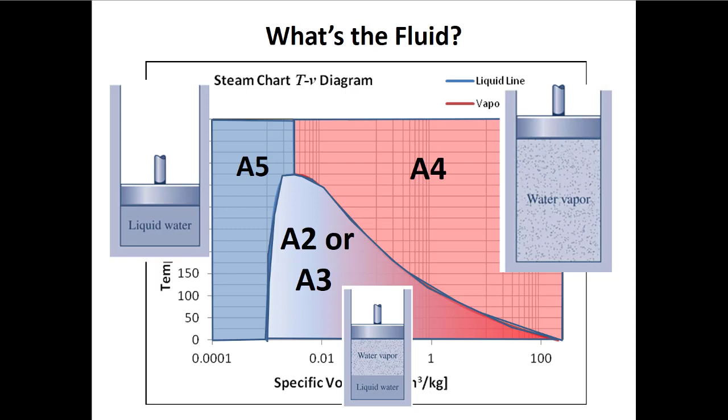So we need to figure out, are we two-phase? Are we superheated vapor or are we subcooled liquid? My advice to you would always be to look under the vapor dome. Are we two-phase? If we're given, say, temperature and pressure, are they the right temperature and pressure for boiling to happen? And if not, where are we on this phase plot?

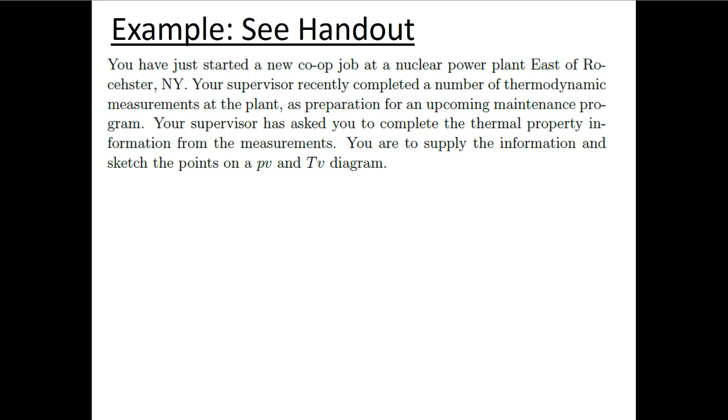The example, which you can find on the My Courses webpage, but if you don't have it, that's okay because we'll go through everything here. But if you'd like to look at it, it's helpful because it has the state table on it. Here we're kind of role-playing that we've started a new co-op job at a nuclear power plant east of Rochester. Your supervisor completed a number of thermodynamic measurements at the plant as preparation for an upcoming maintenance program and has asked you to complete the thermal property information from the measurements. You're to supply the information and sketch the points on a PV or a TV diagram.

So they give us the information in a way that I probably wouldn't like if I was the co-op in question, because I want to have things on a table. But this is often what happens when you're an engineer: you're talking to someone who wants an answer, or wants a particular piece of information, and they just give you the information in the way that makes sense to them. But the way that makes sense to them isn't always the way that we want it.

So in this case, we have a list of values. We know the mass is in kilograms. We have a pressure and temperature at state 1, a pressure and a quality at state 2, pressure and temperature at state 3, temperature and quality at state 4, and they tell us it's a saturated liquid at state 5. This one's a little tricky, because when they tell us it's a saturated liquid, that is enough information to fix the state.

This is kind of a sneaky way of telling us that the quality is 0. So when the quality is 0, we have all saturated liquid. And when the quality is 1, we have all saturated vapor. So here, this is telling us that X is equal to 0.

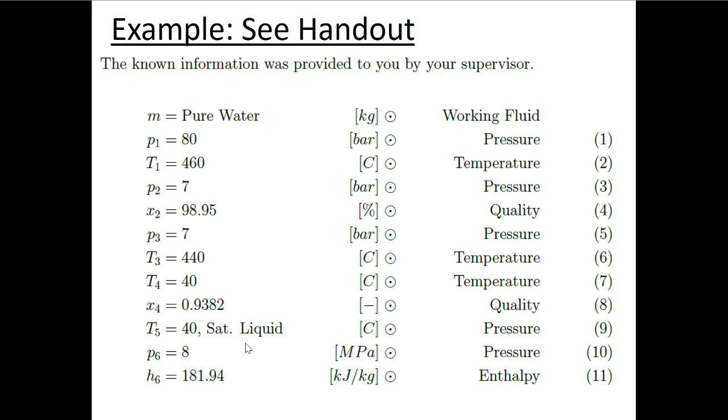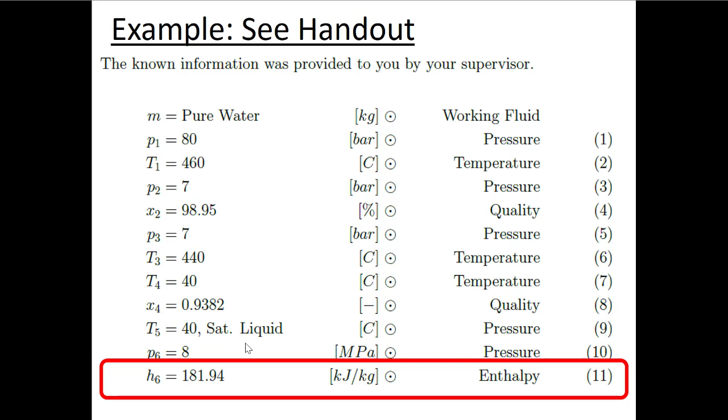At state 6, we're given a pressure in megapascals, and we're also given a specific enthalpy. Now, we haven't worried too much about enthalpy, but it's a property, and we can use it for linear interpolation between two rows on our tables. So just as an aside, we have this property called enthalpy. We will become very familiar with it as we move through the course, particularly as we start to talk about open systems. It's very much like specific internal energy in that it tells us how much energy is locked up in some bit of mass at a given state.

The units are just like specific internal energy, so they're kilojoules per kilogram, or if you were in imperial, this would be BTU per pound mass. So it's still an intensive measurement of energy.

It turns out that as we work through the class, as we develop an open version of the first law, we'll have a term that looks like this: the specific internal energy plus the pressure times the specific volume. Now, what we learned in engineering is that we want to be efficient. So if we've fixed any state, then we know the specific internal energy, we know the pressure, and we know the specific volume.

For any given state, all these pieces of information will always be the same at that particular state. So instead of having to look up 2 or maybe 3 things on a table, we've created these tables with extra columns for specific enthalpy so that we would look less things up, right? We're not lazy as engineers, we're just efficient, because it's a pain to keep looking things up when we don't have to.

So specific enthalpy is just another measure of internal energy, but it includes not only the internal energy, but also this term that's pressure times specific volume. So that's got something to do with that pressure work, like that integral of P dV that we've been talking about. So I guess the thing that's important to know here is that it's not necessarily an independent property. It's a function of the specific internal energy, the pressure, and the specific volume.

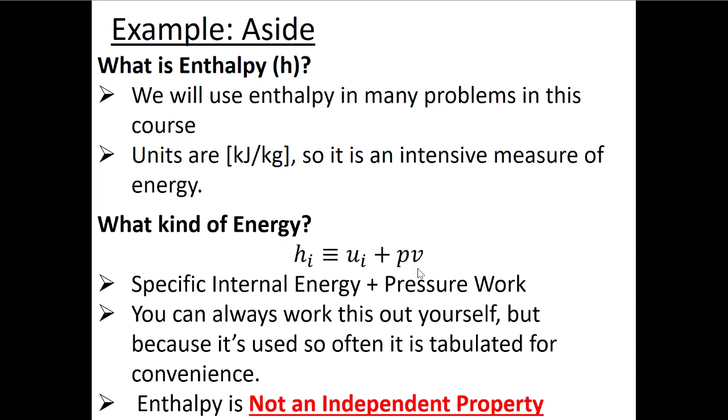So we still need 2 independent intensive properties, and just because you know 2 things doesn't necessarily mean they're independent. So we always have to think about what a particular property is.

So in this case, for this problem, we have this handout, and we have 6 different states. We're going to want to find the temperature, the pressure, the specific volume, and the specific internal energy. And maybe we'd want to find specific enthalpy too, since we looked that up. We're asked to plot all these states on a PV diagram and to plot all these states on a TV diagram. So here's a picture.

If I was working at the same pressure, my temperature would increase. So I get my water out of my tap at 4 degrees Celsius, staying at the same pressure. I put it in my pot and start to boil it. Temperature goes up, and eventually I get to the boiling temperature, or the saturation temperature. Then the water is going to boil until we get all vapor.

Then what's happened is the pressure is going to go up if my system stays closed. The pressure is constant, but to stay at vapor, the temperature has to keep going up if we stay at the same pressure. So the temperature starts to run away after we boil all the liquid. Again, if pressure goes up, this line shifts up, and if pressure goes down, this line shifts down.

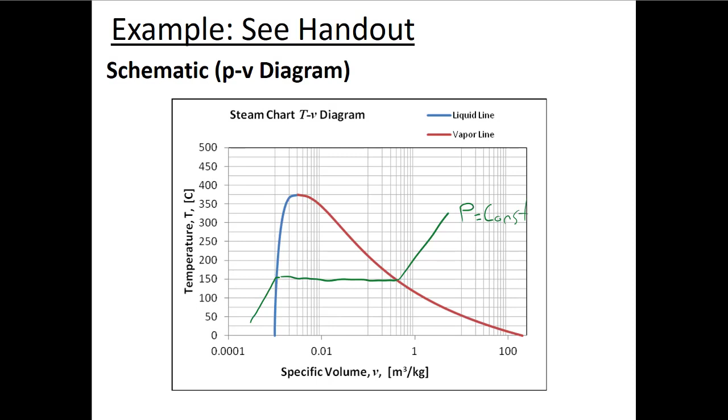So we're given information about 6 different states in this problem, and I want to draw a state table. My state table generally looks like this: I'm going to have the state number for all these different states. Eventually, when we're doing first law analyses, just like we did in the homework, we're going to start moving between states. So as we go from state 1 to state 2, that would be one process, and 2 to 3 is another process. But here, we just want to fix a bunch of states.

The first thing I do on my state table is write down the information I'm given. This is encouraging in this case, because I know I need 2 independent intensive properties to fix the state, and in each row of my table I have 2 pieces of information. So I'm hoping that in state 1 I'm not under the vapor dome, and in state 3 I'm also not under the vapor dome, because if I'm not under the vapor dome, temperature and pressure are independent, and then I'd be able to fix all of these states.

So let's start looking through our tables and see if we can fix all these states and find the information that we're asked to find in the problem.

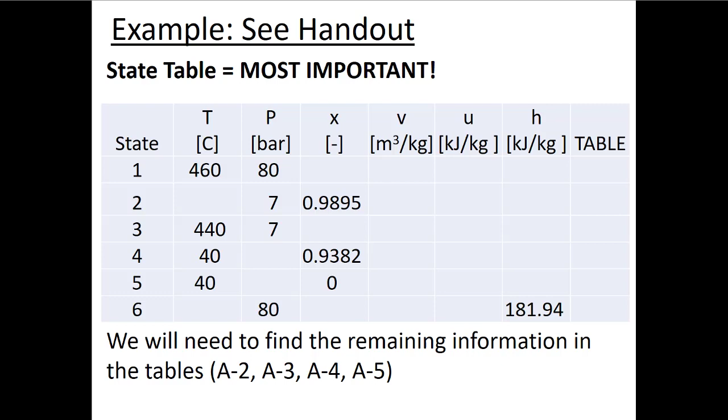Here we state some assumptions. I don't know if really any of these assumptions are actually applicable to this problem, so this might be a bit overkill. But if we were doing a first law analysis, which we will eventually do for big long state tables like this, then we'd have to think about things like whether our particular pressure volume relationships are appropriate, or whether we have to assume things like closed systems or that kinetic and potential energies are negligible.

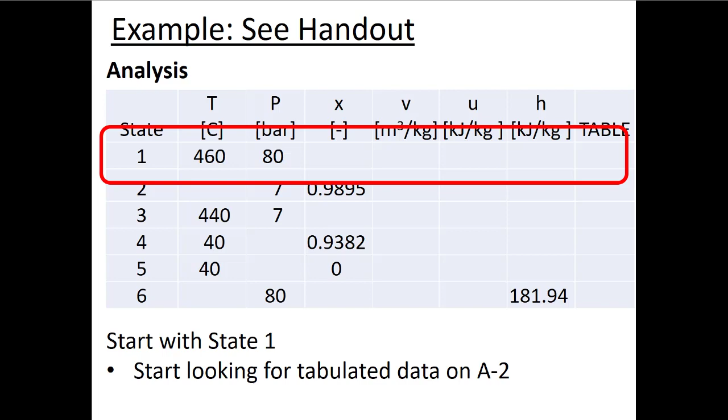Let's start by looking at the first state. We know that we have a temperature of 460 degrees and a pressure of 80 bar. We need to figure out what's in our system - we know it's water, but we need to figure out what phase it's in. Is it a 2-phase mixture? I always like to start in the middle, because then usually if it's not a 2-phase mixture, I can figure out if I'm to the right of the vapor dome as steam or to the left as liquid.

So here I look for the properties of saturated water, and here I know the temperature, so the temperature here is on the left. This temperature maxes out at 374, and my temperature here is higher than that. If I look back here, my temperature is 460.

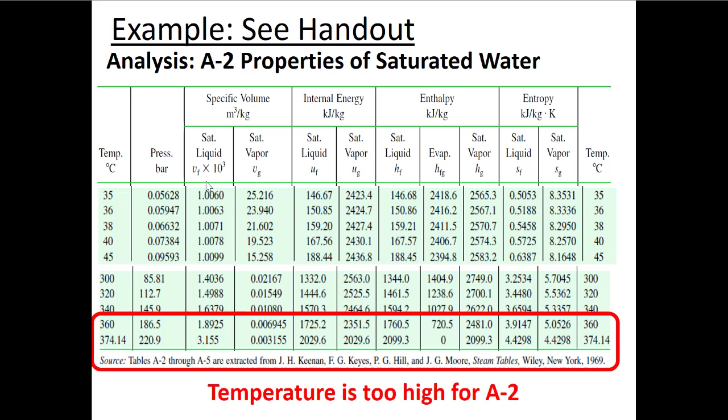So that tells me we're above the critical temperature. So there's no way that we can be under the vapor dome here, because our temperature is too high. We can't, at equilibrium, have a vapor and a liquid existing at equilibrium. So we know it's not under the vapor dome, but I don't know if it's too high or too low.

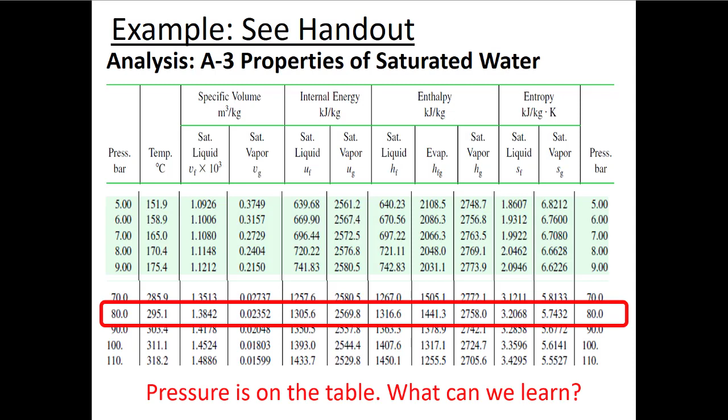So one of the things that I can do is look at the other two-phase table and try to find the pressure that we're talking about here. In our case, the pressure we're looking for, 80 bar, is on the table. In this two-phase table, the second column is the saturation temperature, the temperature that water boils at if we're at that pressure. So if we're at a pressure of 80 bar, water boils at 295 degrees.

But here we're at a much higher temperature than that. So I got to think, does that mean we're liquid water or water vapor? I can bring this back to our common experience at atmospheric pressure, where the saturation temperature would be 100 degrees. We know that if the temperature is above that saturation temperature, we're in the vapor region. And that's true here too, because for the pressure we're at, our temperature is higher than our saturation temperature, so we must have vapor and not liquid.

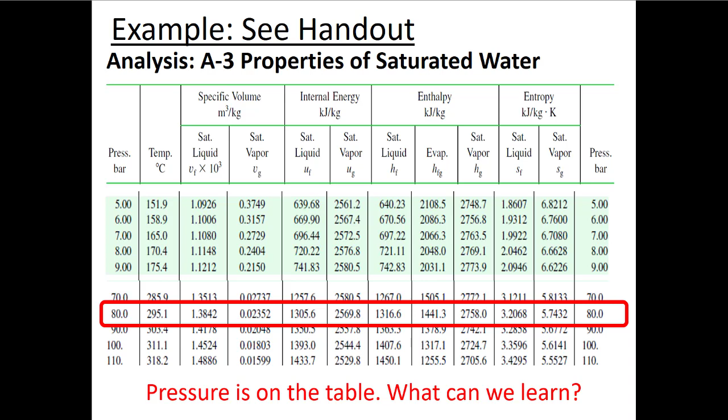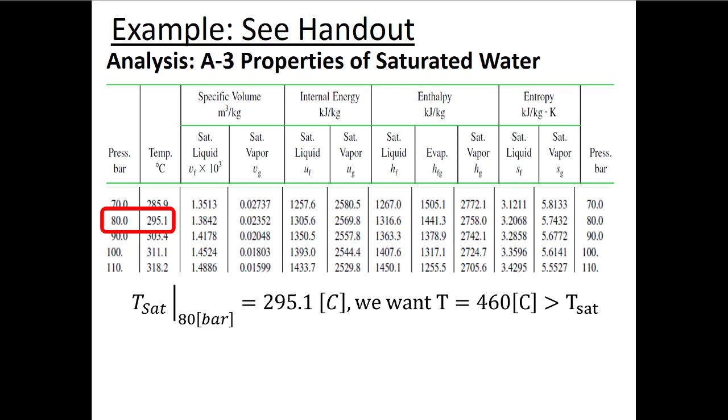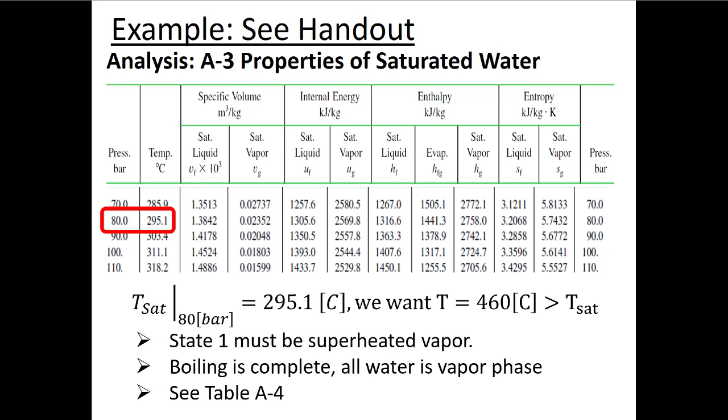Sorry about that. So here, because we're above this saturation temperature, we know we must be superheated vapor. That means that if we were going through a process at this same pressure, we would have boiled up all the liquid water and the temperature would have started to run away on us, and we get this steam. So that means we have to go to table A4 because we're talking about water that's superheated vapor.

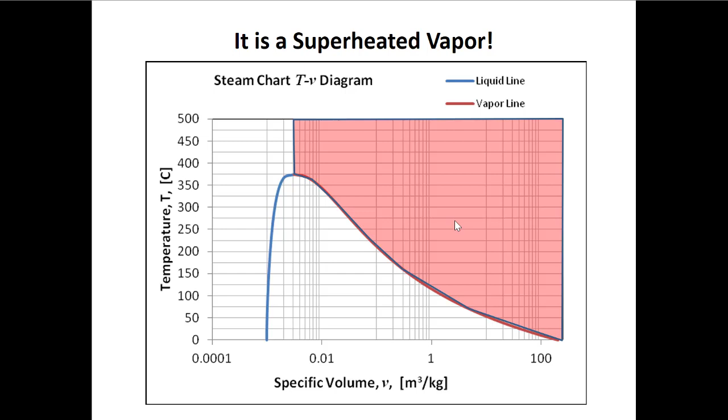So if I'm drawing this out on my TV diagram, I'm going to be in the superheated vapor region, this red region here. Now I look through table A4, which is a series of different tables. I got to find the right table, the one that has the pressure I'm interested in. The nice thing here is that there is a table for the pressure I'm interested in, so I don't have to interpolate between pressures.

Now that I have that table, I say, okay, what's my temperature at state 1? That's 460 degrees. I look now on the temperature column, and I see that 460 degrees is between 440 and 480 degrees. In an ideal world, my temperature is right on this row, and I could just read the data off. This means I have to interpolate between 440 and 480.

Now, 460 is not too bad because it's halfway in between, so I could take the average value of all of these properties. I know that my temperature is 440 plus A times 460, this should be 480 minus 440, and T1 is 460. So here I can work it out and find that A is equal to 0.5. Now in this case, probably you knew that just by looking at it, but if it's a case that's maybe not so simple, then you can work this out using math.

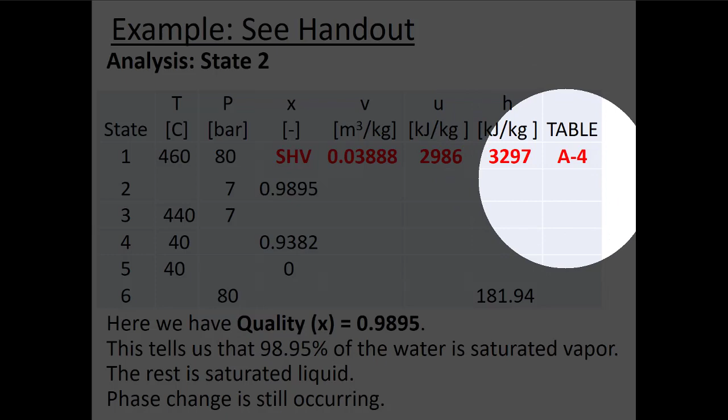So we can do the same thing for specific volume and for specific enthalpy. I can take those values now and put them into my table. It's a little weird because they ask me for the quality, and quality only makes sense if you're under the vapor dome. We're not under the vapor dome in this case. So instead of putting a value for quality, I put SHV to remind myself that this is a superheated vapor. And I also reminded myself that I found the answers on table A4.

So next, we want to do state 2, where we have a pressure and a quality. We know for sure we can fix this state. First, we know it's going to be two-phase because they told us the quality. Quality only makes sense if you're under the vapor dome, so when they tell you quality, it means that you're under the vapor dome.

So quality is given, so I'm going to go to table A3. I always confuse A2 and A3 - one of them has pressure in the left-hand column, one of them has temperature in the left-hand column, so I may have got this wrong. But here, because I know the pressure, I'm looking for the table with the pressure in the leftmost column. So now I know that this is my pressure, and I know my quality is really close to 1. So we know we're under the vapor dome, but we should be pretty close to the saturated vapor values, which have subscript G.

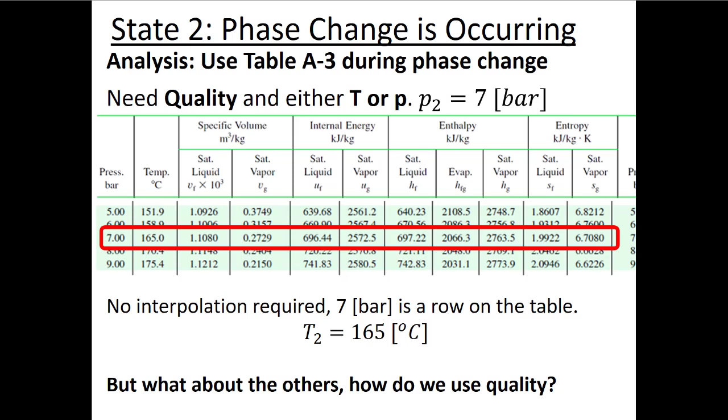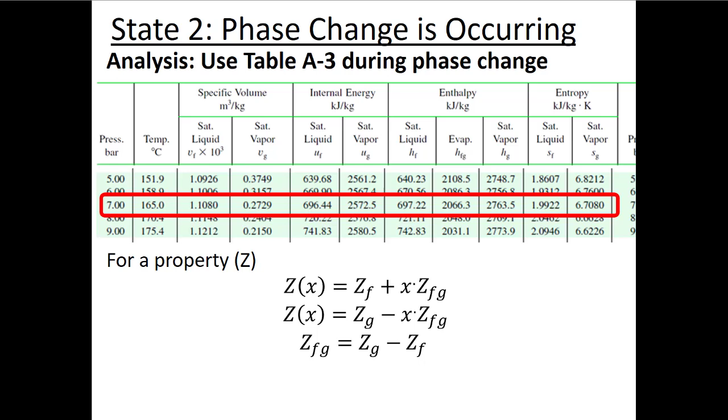Now, for all my other properties that aren't temperature, which I just know automatically, I can use this equation for quality, which is really the same equation we use when doing linear interpolation generally. Quality is like an interpolation factor that only goes from 0 to 1. I use the letter Z here as a placeholder for any property you want, so I can do this equation for specific volume.

But the thing you always got to remember, anytime you're reading specific volume off the tables, your spidey senses should start tingling. You have to remember that this number is not actually 1 — it's been multiplied by 1,000 so they could put it on the table without a bunch of decimal points. That means you have to divide by 1,000 to get back to the actual value, only for VF.

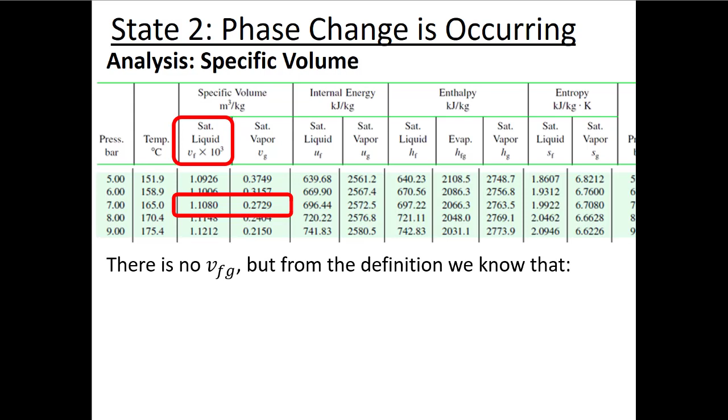There is no column for VFG, so we'll have to do that subtraction, VG minus VF, ourselves. If you're on a test and want to go fast, VF is always very small compared to VG, so you can probably just use VG instead of VFG, but you're more accurate if you actually do the subtraction. So V2 is going to be VF plus X times VG minus VF — this should be a lowercase v.

We read our numbers off the table, put them into our calculator, and find a value for the specific volume at state 2. I got 0.2703. That makes sense, because my quality is really, really high here, almost 1, and my value is much closer to VG than to VF. VF is almost 0 here, so VG is just about equal to V2. So I have some confidence in this number.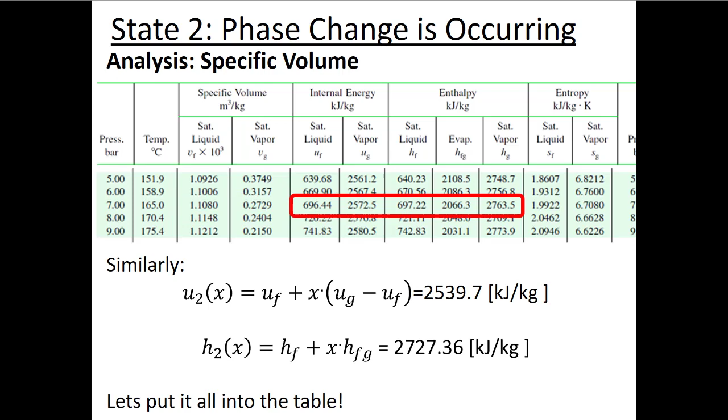I can do the same process for all the other properties. So I write out the same equation for U2, specific internal energy. Again, they don't give me a UFG, so I got to work this out myself. I get a value here, 2539.7, which is pretty close to UG.

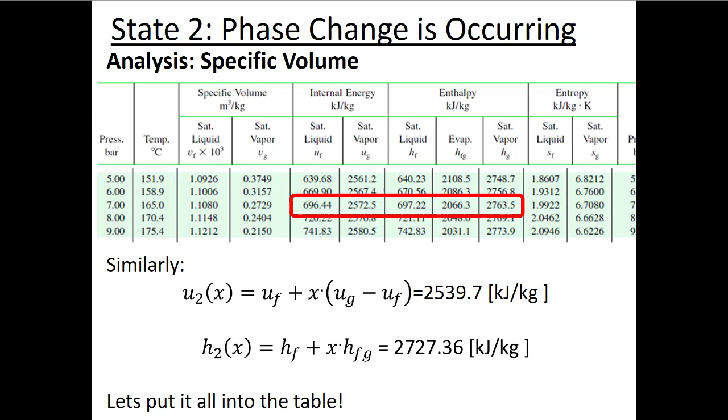For H, it's a little easier because we can put HFG in here, so it's one less thing I can mess up putting into my calculator. If I'm going to make a mistake here, it might be forgetting this column is there — maybe I'd write this down thinking it's HF and this is HG by mistake. I could mess it up that way, but they're trying to help us here. Again, I got a value for H2 that's pretty close to HG, so I feel pretty good about these values.

Next, I move to state 3. State 3 looks like state 1 in that I have temperature and pressure. The temperature is pretty close, but the pressure is more than 10 times less. Let's see if we can figure this out — I'm going to guess that it's superheated vapor, but I could be wrong. So I'm going to look in the superheated vapor table first. Normally I would look in the middle, in the two-phase region, but because I did one that was similar, I'm going to guess superheated vapor.

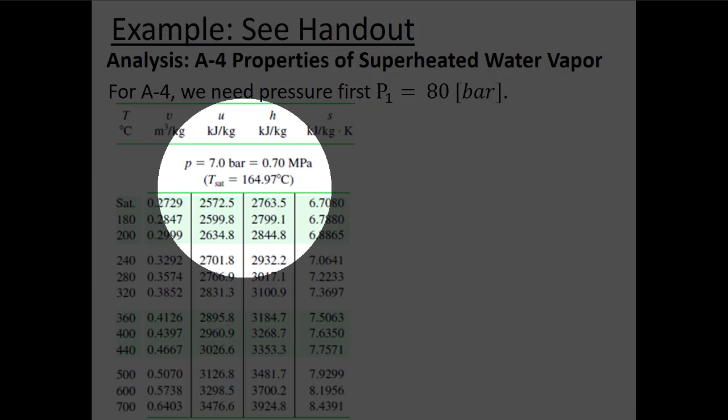For a pressure of 7 bar, this superheated vapor table tells me the saturation temperature is right around 165 degrees. My temperature is 440 degrees, a lot bigger than 165. That means at this pressure I'm past the boiling point, so I'd expect to have superheated vapor again, or steam.

Here my temperature is 440 degrees, and I'm thankful that I have a row that's 440 degrees, so I don't have to do any interpolation. I just read the values off this line and get specific volume for state 3, specific internal energy for state 3, and specific enthalpy for state 3 as well.

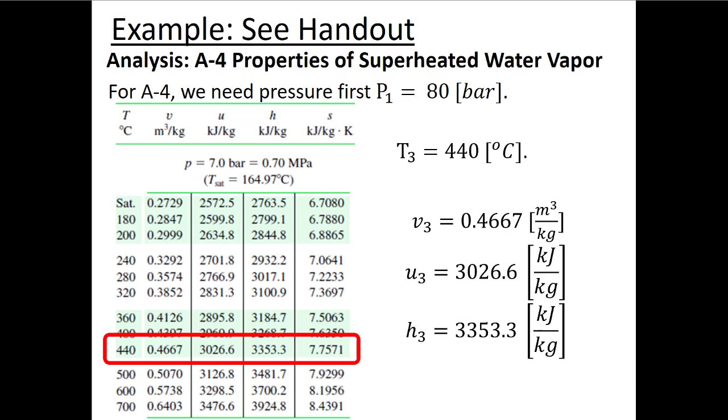I track my units in all of these cases, and on table A4 they always tell us the units right up at the top. So I put all that information here. Again, it doesn't make sense to talk about quality here, so I write SHV for superheated vapor. You could also just put a line here, or NA, for not applicable.

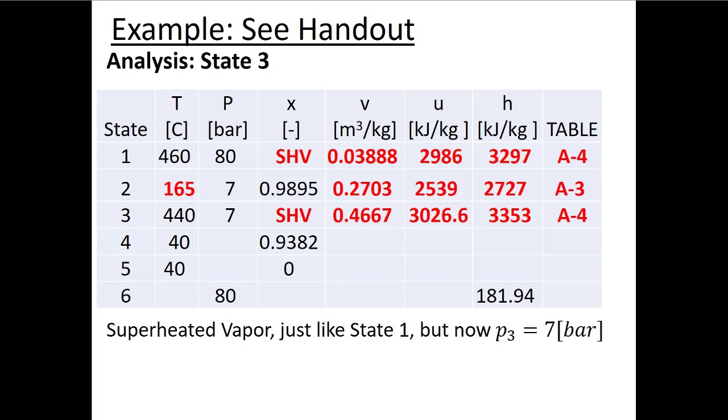State 4 looks a lot like state 2 because it tells me quality, but in this case I'm told the temperature and not the pressure. So it's a two-phase mixture. I know that already because they told me the quality, but I'm not going to use the same table I used last time because this time I know the temperature and not the pressure.

Now it can happen that when you're drawing these yourself, you get to a point where they're not in the same region. This one is nice because it's drawn to scale—maybe yours is not drawn to scale, so your vapor dome's not in the right place, or it could be that you made a mistake somewhere. So you do have to think about it a little bit and try to reflect.

So now we can go to state 4, which we know is two-phase, because we're given the quality, and we're also given the temperature. So we need to look on the table here that has temperature as the leftmost column. In this case, our temperature is 40 degrees, so I already know the pressure because it's two-phase and it's 40 degrees. But for all the other properties, we're going to use an equation like this.

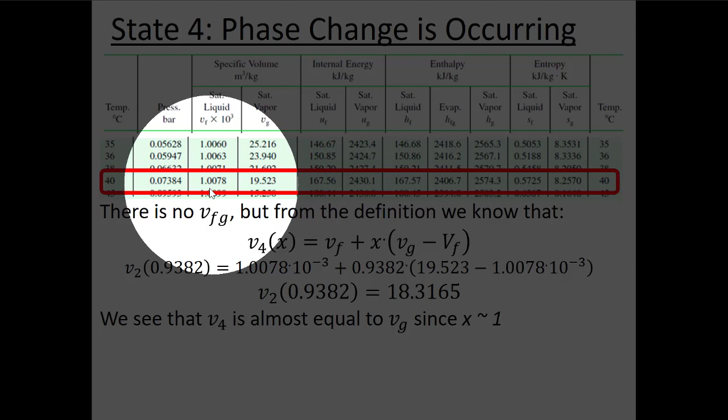And because the quality was still pretty high, I think it was here, 0.93, almost 0.94, we should be much closer to 19 than we are to 1 over 1,000. And we see that in our final answer of 18. I should have my units here—this is meters cubed per kilogram because I'm reading it from over here.

Next, we come to state 5. The tricky thing about state 5 was that it didn't outright tell us what the quality was. Instead, it told us it was a saturated liquid. And because it's a saturated liquid, that spidey sense should start tingling, and we know that's code, right? That's secret engineering code for x equal to 0.

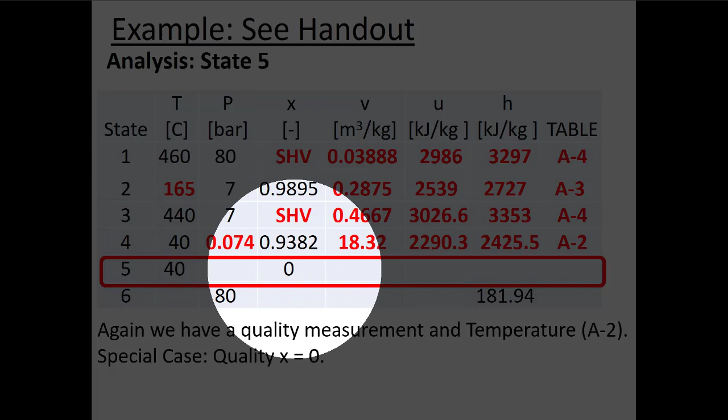So here our temperature is still at 40, but we're liquid. If this was a process, this is some kind of cooling process going from temperature of 40 and mostly vapor, cooled down to the same temperature, but all liquid. So my quality is equal to 0, which means anytime your quality is between 0 and 1, including 0 and 1, I would use those tables A2 or A3, depending on if you knew the temperature or the pressure.

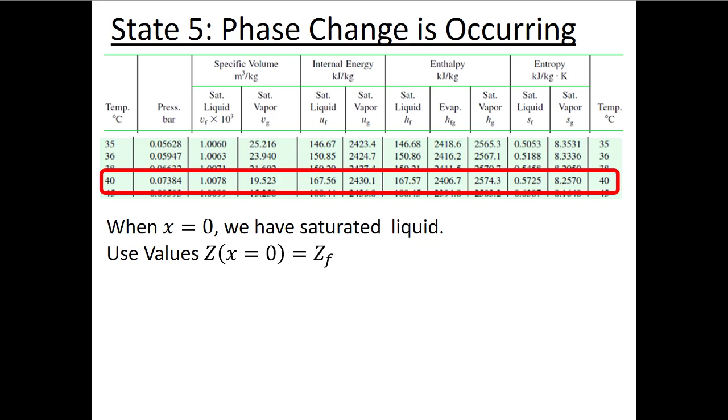So X is given, but in words, not in a numerical value. And X is equal to 0, which means that it's a saturated liquid. And saturated liquids are great because now we don't have to do any kind of interpolation. So we know we're saturated, temperature of 40 degrees, we're saturated, so this is the pressure.

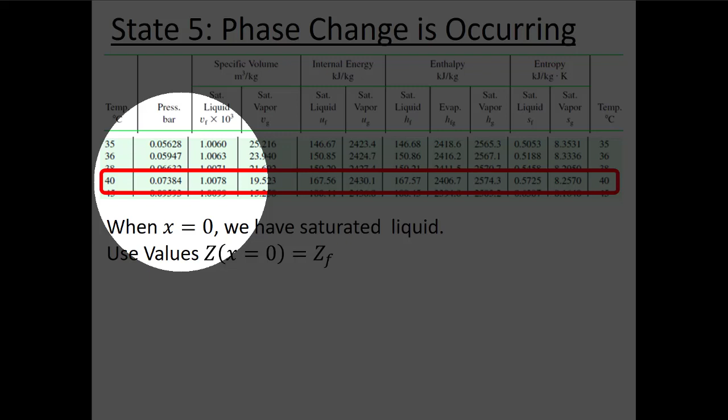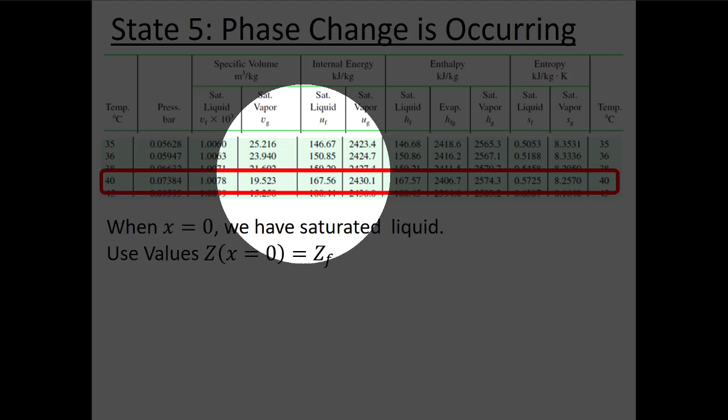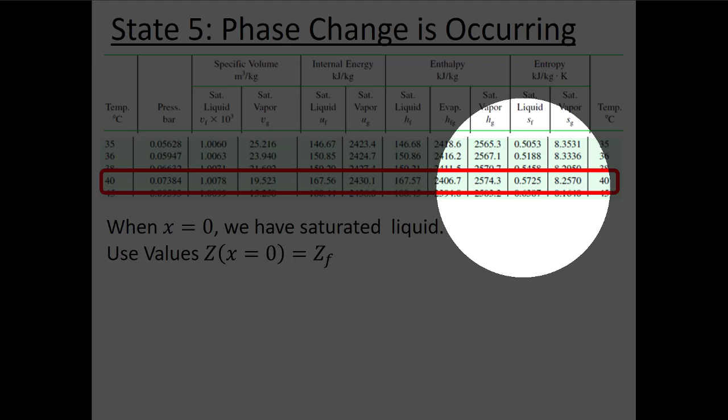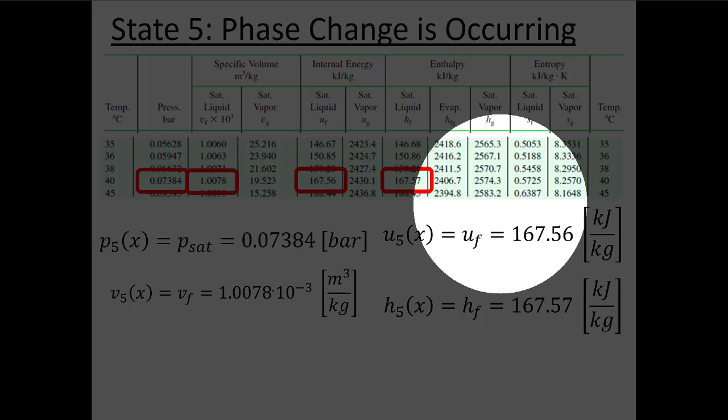And now I just pick off the values that have a subscript of F. So if I want the specific volume, it's VF. Remember, we got to divide this by 1,000. If I want the specific internal energy, it's UF. If I want the specific enthalpy, it's HF. And if I want the specific entropy, which we're not looking up in this problem, but if I did, it would be SF. So in this case, in my equation, it's always VF plus X times VG minus VF. But if X is equal to 0, it's just VF. So I'm basically just reading these numbers off the table where I say, oh, V5 is VF, U5 is UF, and H5 is HF.

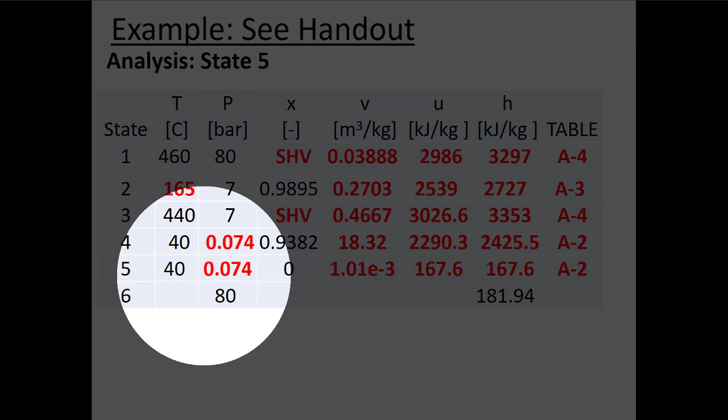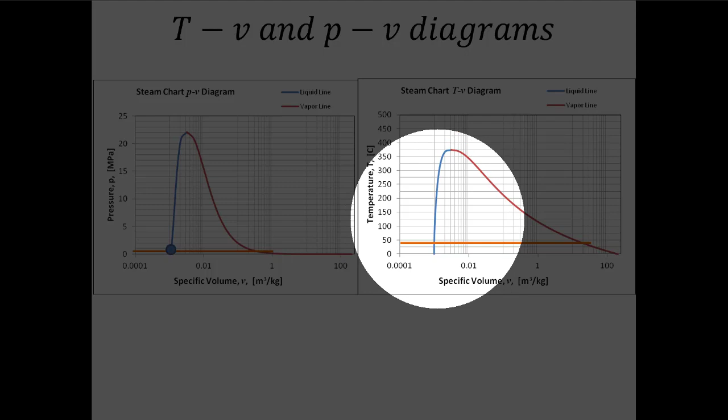That's good. I have all these values, and I can just put them in. I got to draw this again. So here I know my pressure is really, really low, because over here, I looked at my temperature was known, and I was under the vapor dome, which means that I know this pressure, it's pretty low. So here I can look on this table, and I draw a very low pressure line, and I know quality is 0. So it's where this orange line intersects with my blue line for saturated liquid, right there. Similarly, I knew that the temperature was 40 degrees, and this orange line intersects with the saturated liquid line here.

This is good, I'm almost done. I just have one state left, and this is the state that's the most different. So here, we need to know the pressure, or we're given the pressure, 80 bar, so we're back up to a high pressure. And I know the specific enthalpy, H. So now we have a pressure and an enthalpy. How do we fix the state? This is different than all the other properties.

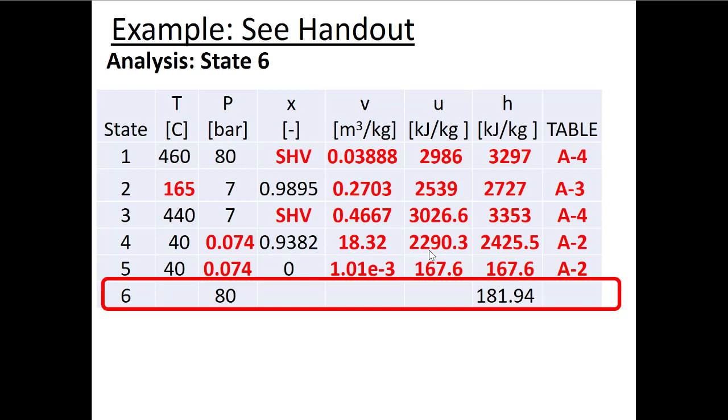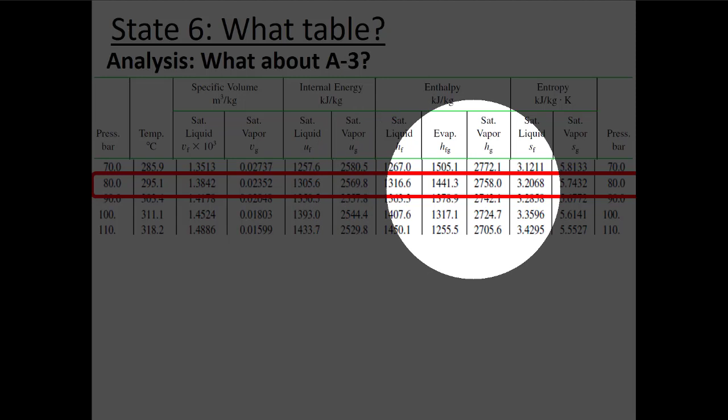So the first thing that I want to ask myself is this a two-phase mixture? How do we fix the state? Is it a two-phase mixture? So what I'm going to do is I'm going to go to the two-phase table where pressure is on the left. My pressure is 80 bar. And if my pressure is 80 bar, if I'm a two-phase mixture, I have to be between HF, which is 1316.6 kilojoules per kilogram, and HG, 2758 kilojoules per kilogram. So I look on this table, 80 bar is there. So I'm not above the critical point. So it is possible that we're under the vapor dome.

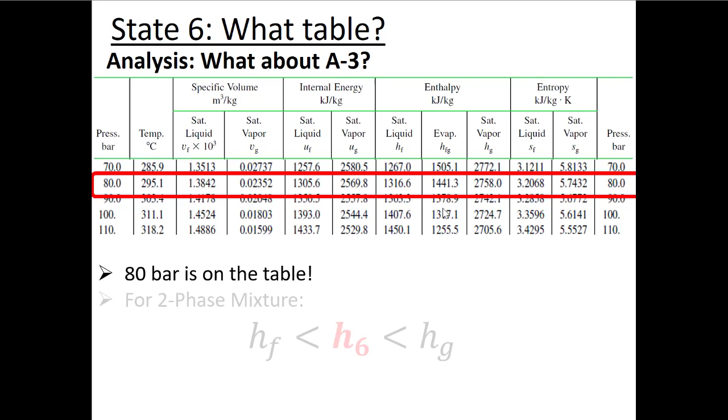So now I want to see, is H6 between HF and HG? Now I know HF is 1316.6 kilojoules per kilogram. HG is 2758 kilojoules per kilogram. The problem told me H6 is 181.94 kilojoules per kilogram. So it's important here because we're off by more than a factor of 10. My first thing to do would be to check the units, so that it's not in megajoules per kilogram or something funny. But the units are the same. And here I see that H6 is much less than HF. So as X increased, as I transition from saturated liquid up to saturated vapor, specific enthalpy increased. And if we kept going as a superheated vapor, enthalpy would continue to increase.

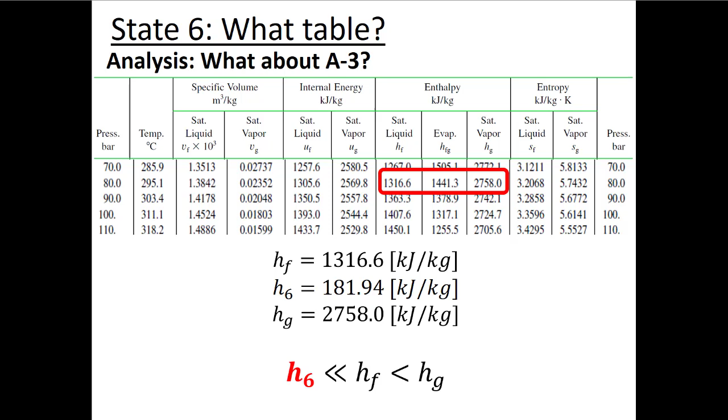If we moved the other way from saturated vapor down to saturated liquid, the specific enthalpy is decreasing, and if we cooled further to a subcooled liquid, H would continue to decrease. So because H6 is less than HF, that means we're a subcooled liquid. If H6 is less than HF on this diagram, you're a subcooled liquid. If H6 was greater than Hg, you'd be a superheated vapor. And if H6 was in between HF and Hg, you'd have a two-phase mixture. In this case, H6 is below HF, so we have a subcooled liquid.

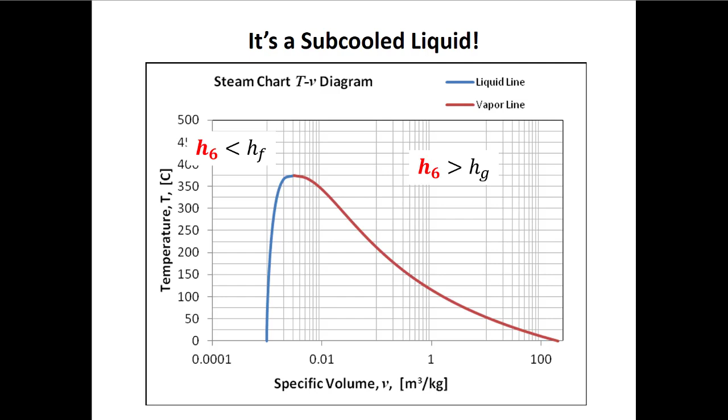So we're in this subcooled liquid region, and that means we have to use table A5. So here we have 80 bar. The problem with subcooled liquids is that the data is pretty sparse - there's not a lot of tables in here, so it's unlikely you're going to find a subtable with the right pressure.

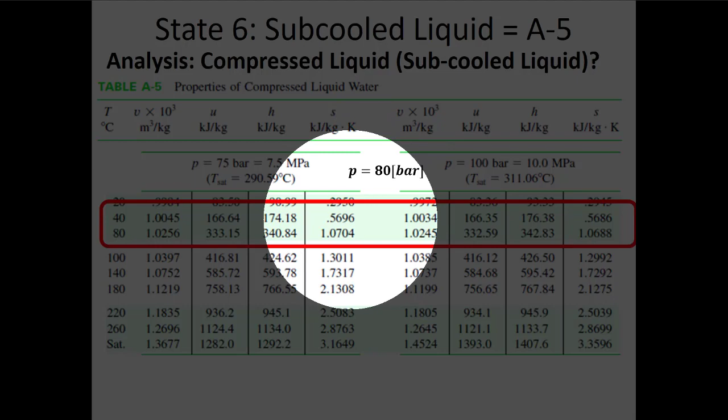So when you have a subcooled liquid, you're almost always going to have to do a double interpolation. In this case, we need to make our own table. We can see the temperature will be between 40 and 80 because our value of H is in between these two numbers. I don't have to recreate these whole tables, but I do have to make myself my own table for 80 bar with these two rows. Now, you can tell I don't like doing this because there's a lot of arithmetic involved - I even drew a little sad face over here, so hopefully it's obvious I don't like doing this.

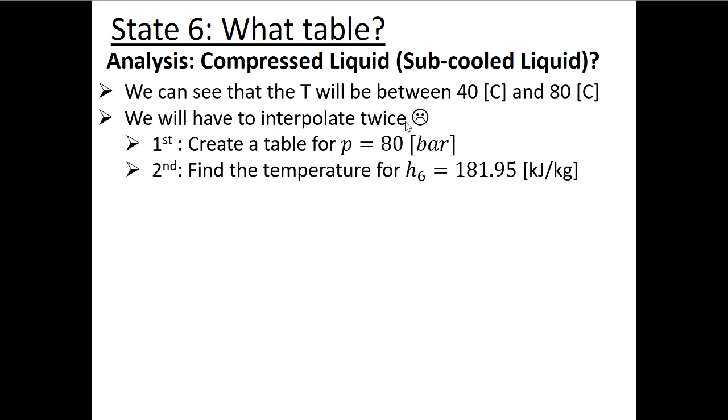We're going to learn some tricks about what to do with subcooled liquids, but until then, we're kind of stuck with double interpolation. So we're going to make our own table here. First, we're going to interpolate with pressure - we know we have to go between 75 bar and 100 bar, and we're at 80 bar. So I can find my interpolation factor here, and it turns out that it's 0.2 - I'm 20% of the way between 75 bar and 100 bar.

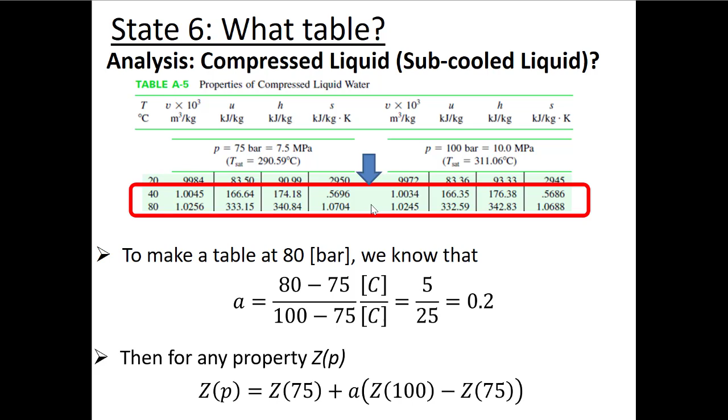So that means for any property on this table, if I want to interpolate between these two tables with pressure, I use this equation: Z at P is equal to Z at 75 bar plus A times Z at 100 bar minus Z at 75 bar. So what I want to do is make my own table. I do this here for specific volume - this is at 80 bar for 40 degrees and 80 degrees. I'm eventually going to have to interpolate between these two rows as well, but for now I'm just trying to take this data and make my own 80 bar table, so here I can find these two values for 80 bar at 40 and 80 degrees Celsius.

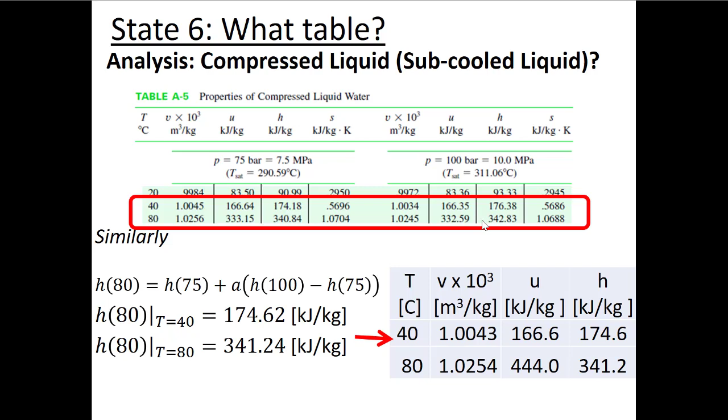I can do the same interpolation for specific internal energy, and I see that it's going to run from 166.6 at 40 degrees to 444 at 80 degrees. And for specific enthalpy, it runs between about 175 and about 341. So now I have my table, but I want to be in between these two numbers - good, my value of H is in between 174.6 and 341.2. So now I'm at the point I would have been if they had put the right table in the appendix. Now I've got to make my own row on this table that fits somewhere in between 40 degrees and 80 degrees, or more specifically, between 174.6 kilojoules per kilogram and 341.2 kilojoules per kilogram.

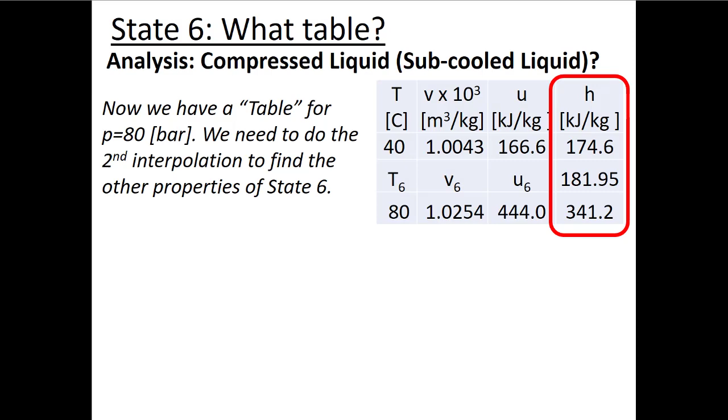So I'm at 181.95, so now I've got to find my interpolation factor B. My interpolation factor B is going to be H6 minus H at 40 degrees, divided by H at 80 degrees minus H at 40 degrees. So I can put these numbers in: 182-ish minus 174.6, divided by 341.2 minus 174.6. And when I do this, I get that I've traveled just under 5% of the range.

If this was a test, I would probably have done this calculation and said, look, Professor Schertzer, it's 4% of the range. I'm just going to take the values over here at 40 because interpolation takes a long time and these numbers are going to be pretty close. If you did that after writing that sentence, you would have displayed your understanding of how to do this. But even if you thought this and just wrote down the values here at 40 degrees without writing that sentence, I have no idea if you know what you're doing or you just got lucky.

So help me out, right? This is one of these kind of help me help you kind of things. If you write down what you're doing and why you're doing it, then I'll see that you understand the question. That's what I have to grade on a test or homework - did you demonstrate your understanding? Because there's no way for me to actually know if you understand it or not. So you have to tell me why you're doing what you're doing.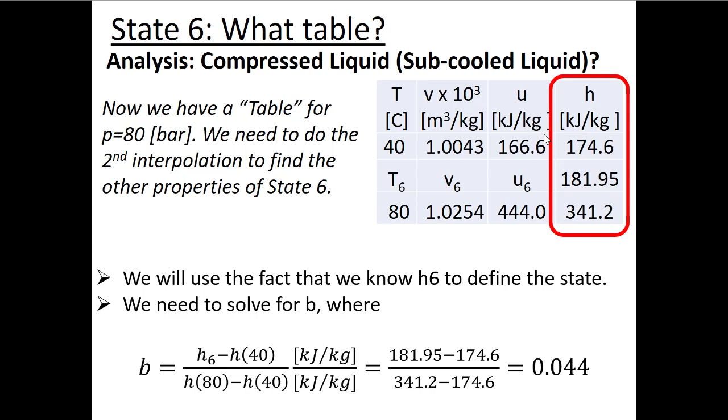So we can use this interpolation factor, which is just under 5%, and we can find the temperature. This is going to be 4.4% of the range. So I'm at 41.76 degrees. So I can put that on my table.

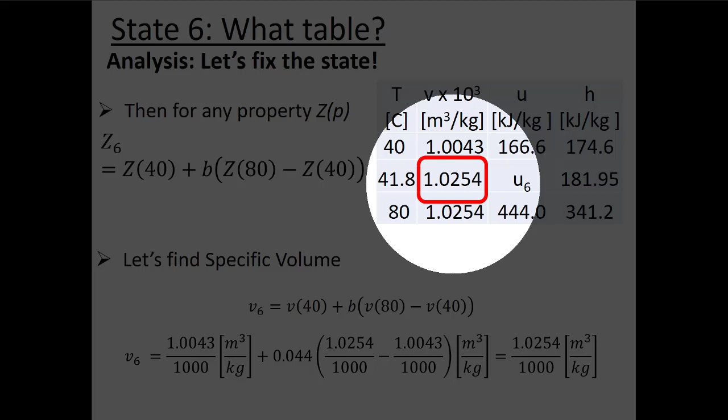I can do the same thing with specific volume, remembering again that these numbers have been multiplied by 1,000. I even wrote that on my table here. So this is still, again, 1 divided by 1,000. And I can do it also for specific internal energy, and I get just under 175 kilojoules per kilogram.

So now I filled out my whole state table. This last one was a little bit rough, a little bit longer to do, because it's this double interpolation. Like I said, we're going to use some tips and tricks to short circuit that process to make life a little bit easier. But for now, we know that this double interpolation is potentially something that we need to be able to do.

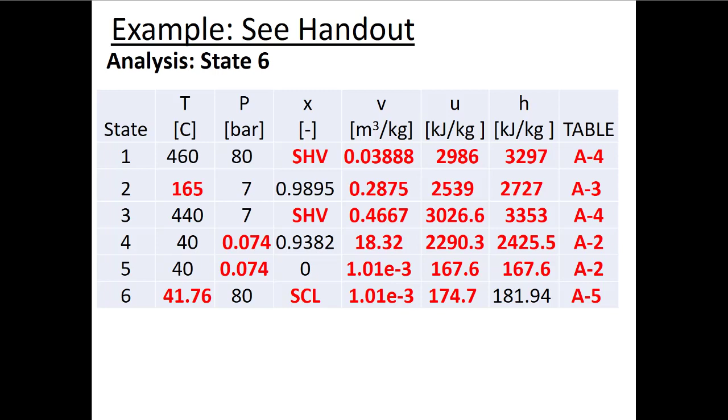We fixed all the states. We haven't plotted them all yet, so we do have to plot this other state. We know it's going to be subcooled liquid - let's see if that's what our data tells us. We know the pressure, we know the specific volume. So in this case, we did get our state 6 in subcooled liquid on our PV diagram.

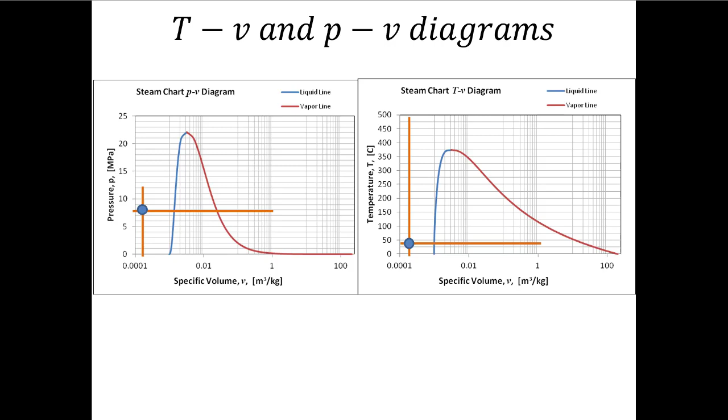We know the temperature and we also know the specific volume, and again we're over here to the left of the vapor dome, and that's what we want to be when we're subcooled liquid. So this kind of makes sense. At the end of the problem, we say, does this problem make sense? Do our answers make sense? We can't prove they're right, but hopefully we can't prove they're wrong either.

So we check our units all the way throughout the whole problem. When we were trying to find specific volume, we got meters cubed per kilogram. When we were trying to find specific internal energy or specific enthalpy, we got kilojoules per kilogram.

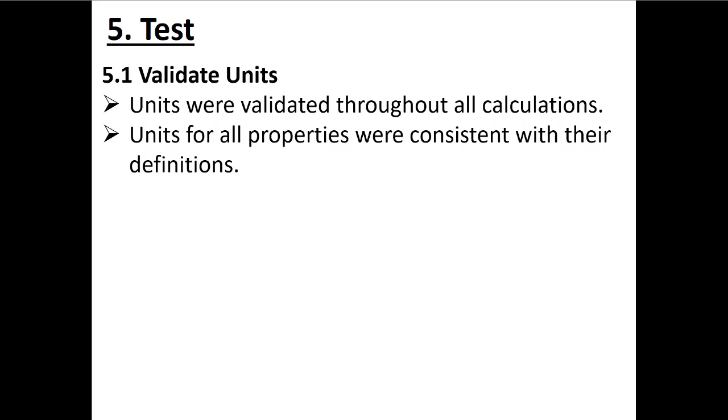So that's good, right? And the other thing is, even though I really have no conception of whether any of these numbers are correct - I don't have a feel, maybe some people do, like oh that's the temperature and pressure of my liquid, I bet the specific internal energy is 1,042 - I don't know. But I do know that when I plotted them all on the PV and TV diagrams, I got that all my points were in the right part of the table that I thought they were going to be, based on the phase that I thought the material was at. So again, I can't prove my answer's right, but I also can't prove it's wrong. And that gives me some confidence that I'm at least moving in the right direction.

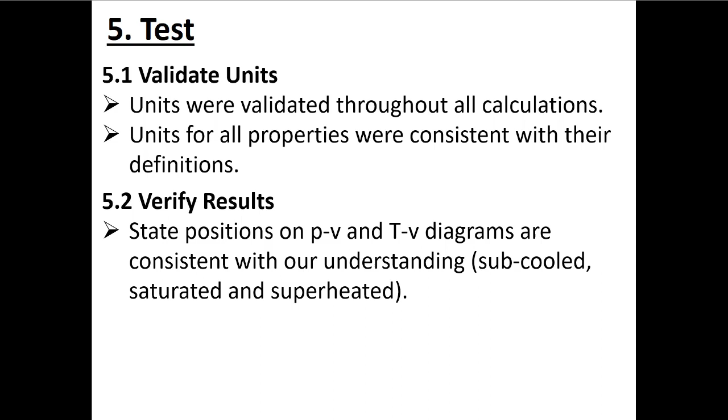Sometimes that's the best that we can do before we test something out, either numerically or in a scale model or something. So again, applying intuition - I'm not sure how much intuition I have about whether or not the numbers are right, except that the units were correct and I got everything in the right phase that I thought we would be in. That's all I had for today, but I'm happy to entertain questions if people have questions about the examples we did today, or maybe even about the homework.